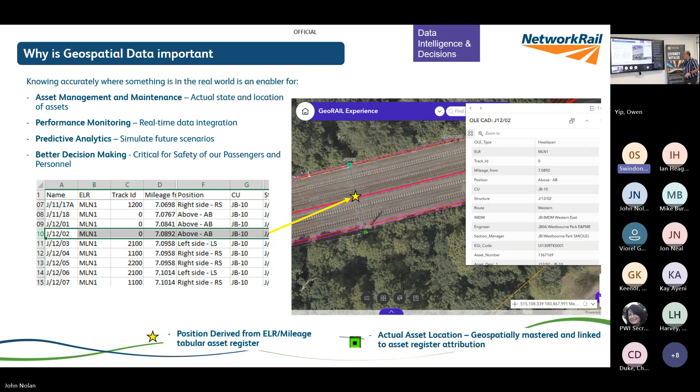As part of that problem statement, I think it'll come up in a second on the screen - yeah, Uffington Road Bridge. I put these slides together for the heads of asset management a couple of months ago, and I was on the train coming down. I know Uffington Road Bridge from a long time ago. The top is an example of some of the assets that are in that location, and underneath the image is some of the data sets - and that's just a minor amount of the data sets that are in there. You wouldn't fill the slide with that.

So what we're trying to do is understand what information is in this location and across the route. How do we visualize it, and how can we link to the system that's there, or if we don't link to the system, how do we understand where it's located? So that's the big issue that's there.

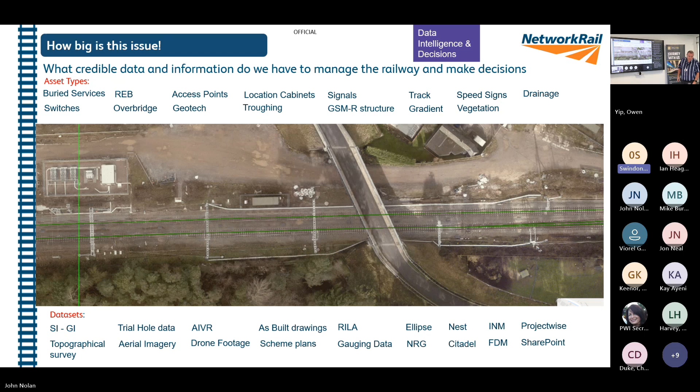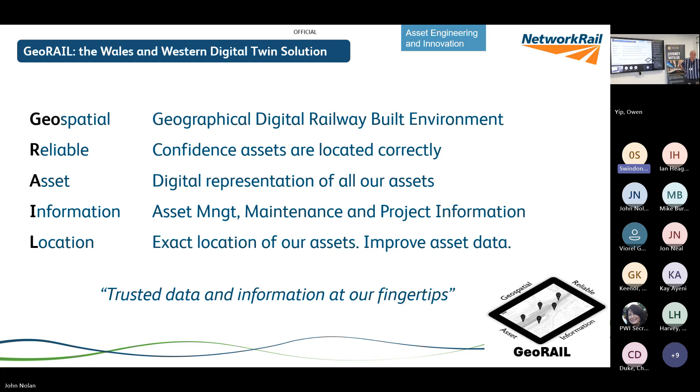So what we're doing is working on GeoRAIL - Geospatial Reliable Asset Information Location. It's our own term we thought of ourselves, it's our own logo we thought of ourselves. But you know yourself, you have to have a catchy name for something you're trying to work on, and that's what goes around the business. It is being used quite a bit actually at the moment. So it's all about people understanding the data and information that's available for them as well. This is kind of like the mechanics behind it.

So what we're trying to do is visualize the physical railway in the digital world. We have 2D information, 3D information, and reality information, that's point cloud photographs. Even last week, Ollie, who's part of the team, was talking to some of the maintenance guys about doing 3D scans of the access points.

So they can understand how it works, and that's part of that reality data. What we're trying to do is talk to asset management, maintenance, and projects to capture requirements. Asset management is fair enough, I'm in that world and can understand the requirements and linkage there. National Records Group - where's the health and safety file? Where's the as-builts for all those shiny overhead line structures around the route, and how do you get access to them?

From a maintenance point of view, they've got a lot of systems they use, a lot of maintenance scheduled tasks, work orders. How do we visualize the information they want? And not only that, the information from their SharePoint sites - how do we even get that feed in? That's part of the requirements we're capturing with them.

And then of course there's the project data, the project information - is that health and safety files again? It's the project information. If a survey was done, where's the survey, where's it located? So we're working on that at the moment, to have a visualization of surveys that were done in the past, even if done 10 years ago, it doesn't matter. For Maidenhead Station, when they were working on platform 1, a 2016 survey of the embankment was used as part of that.

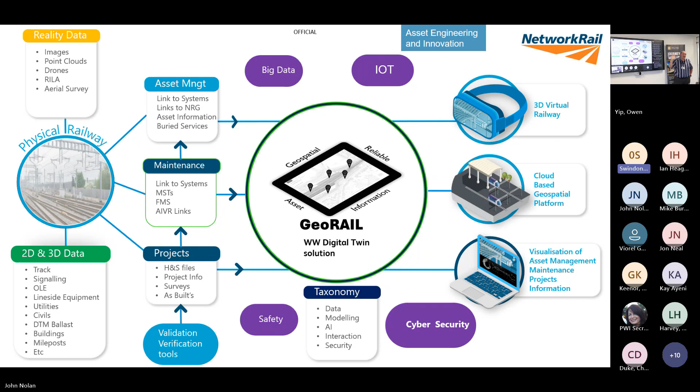So the plan is that we have a 3D virtual railway, a cloud-based GIS platform, which is the key to bringing it all together. The geospatial platform is key for the virtual railway, and that enables people to visualize the data they want to see. So what does it look like?

Some of the work we're doing here, we are building an ecological database, that's going to be a back end to this. We're working with the ecological teams in Wales and Western, very advanced on that, capturing their requirements, and we're working with Esri to build a solution into this for external and internal use. That's going to really change the dynamic on ecology, because at the moment everything is all over the place in different storage locations and not really managed.

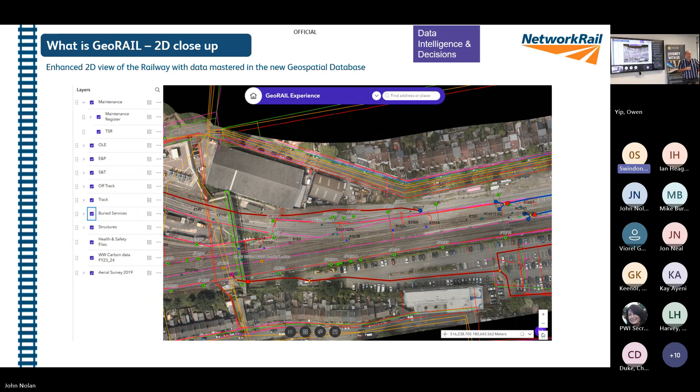Part of it as well is that from the requirements we're linking up to parent-child relationships with Ellipse. So any work orders, maintenance schedule has the history behind that as well. We've done an awful lot of work behind that. We're connecting into Ellipse, so it'll be a live feed from Ellipse in here. And if you click on an asset, it'll tell you this is my work order, this is work outstanding. And then as we move forward, we're talking with some people about generative AI.

You can ask the question, how many work orders have I got outstanding this week? What's my future work orders? Or from a managerial point of view, how many has the team got outstanding and who are they with? Things like that. So we're working on that world as well as part of that.

But that's based on the need to display those MSTs and work orders in the geospatial world. Because at the moment they're all in Ellipse and it's all structured data, tabulated. We want to put it in the real world and make that view as part of that.

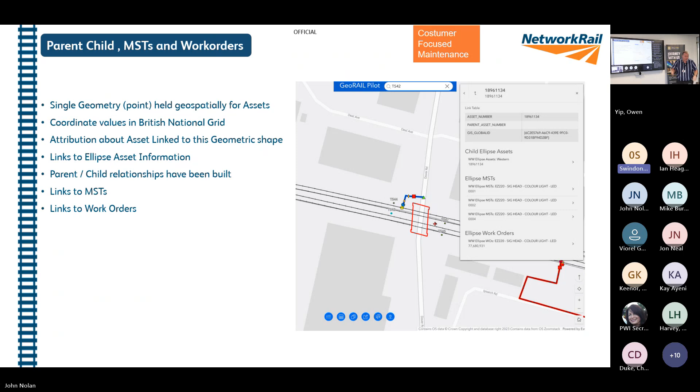So just to go back, links to Nest, which is the structures database, link to health and safety file, link to the OLE as-builts, that's already in there. So this is an old slide. That was the 2D world. That's based on GIS, and that's the linchpin behind everything we're trying to do.

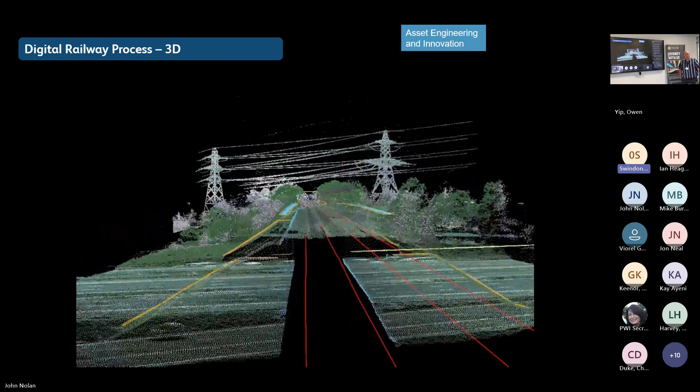Just moving into the virtual world. Here's an old video from, I don't know, 7-8 years ago, Bristol Parkway proposed OLE design in here. I'll just show this to show the people in Network Rail and outside the process to create the data sets we have geospatially. So we're validating all our asset data geospatially based on this information, which is a RILA train-borne survey, which is highly accurate for local geospatial, and also aerial scans.

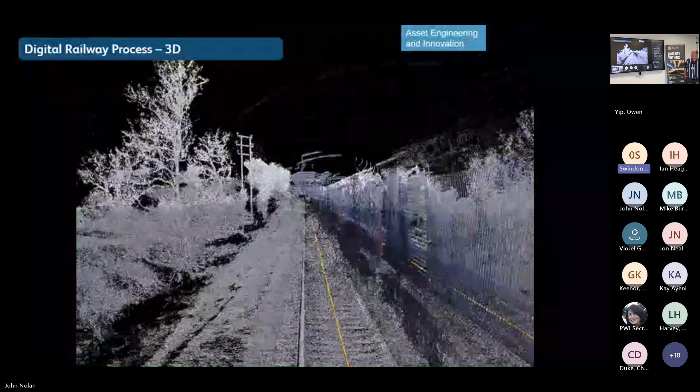But from that, and we're very lucky that we had WEP and Crossrail and Poplar Line and Old Oak Common, they'll all feed into this as well. But basically, we're building this digital view of the railway, which has all our visible assets in there, and where possible, our underground assets as well. I'll just let it play out, but it's just showing you what we're trying to do.

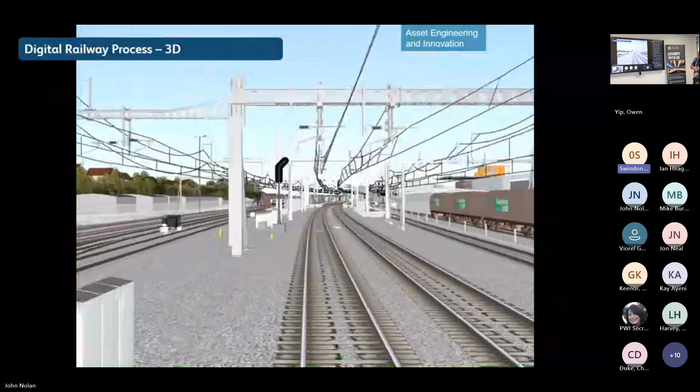And the key thing for this is it's all about keeping people safe. So it'll be open to anyone in the business or externally to actually make decisions and understand from that immersive view. And I remember on outside they were replacing some old switches near Maidenhead a long time ago, and they wanted to have that view and see what the design looked like. And that's what we're trying to do.

So the key message from this is if you're not already doing it, your 3D design needs to feed into this. Your 2D design is fantastic, but your 3D design needs to feed into this as well. And it's happening, it's happening in enhancements. We're trying to get that into a better state in other parts of the business.

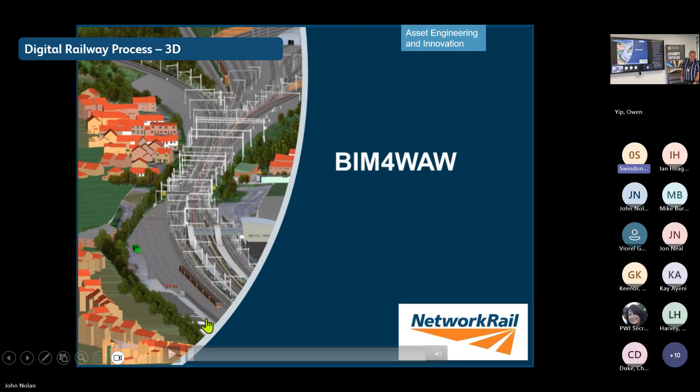Okay, so what's the benefits? That's outside Bristol Parkway Station. What we're trying to do is build an environment, and it's not iTwin - I'll go through that in a minute - iTwin is kind of the foundation for it. We want people to place measurements, identify coordinates, create sections, and basically allow anyone in the business to see what's there and make decisions based on that.

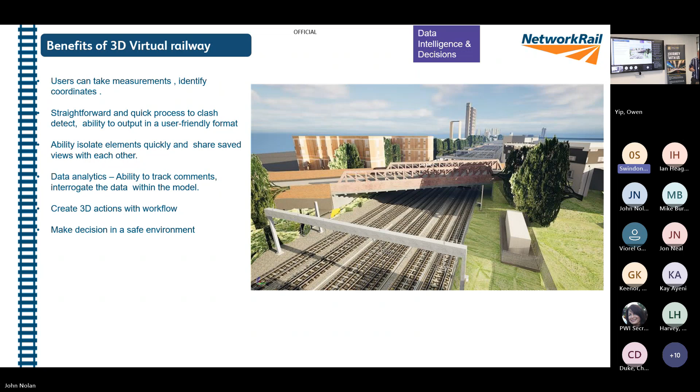Here's some old slides that were decisions that need to be made on the Great Western Electrification Programme. In this example here, the model was there, the railway structure was in 3 dimensions, and they needed to move 50 functional supply units from Reading and Newbury to another part of the route.

That's when there was an awful lot of to and from with assets and installation, and that took 2 hours. The thought behind it was we have to drive to site, get out of the car, find the access points, maybe get a possession, get a site safety, and walk that 16 miles. So it's good to have the 2 hours we're doing a virtual walkthrough instead. That's what we want for our people on the ground, in projects and in maintenance as well.

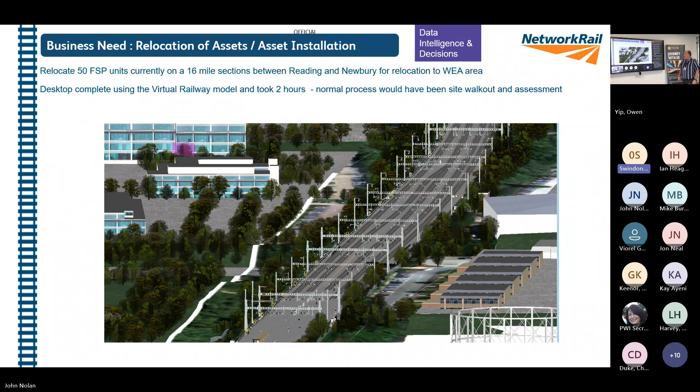This is an example of buried services that we inherited from those projects. This slide was done at the time because there was a fire nearby, and they wanted to understand what assets were on the railway. So this was put together to show what's there. But I'm showing this slide to demonstrate what underground services should look like and what our plan is to push it out across the route over time. It's not going to stop people digging underground, but if you're aware of what's underground, you'll make more informed decisions. We learned that on electrification too, putting in trial holes and things like that.

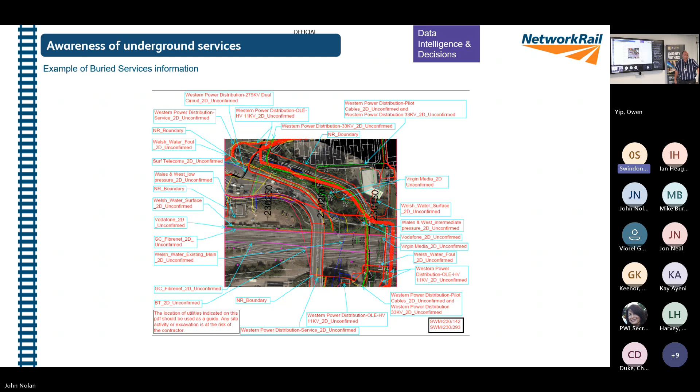One of the groundbreaking things we did, and Ollie played a main part in that, was Severn Tunnel. Everyone knows what it's like, everyone knows about the access conditions - it's just a dark patch for about 10 minutes. But we created a 3D virtual model of Severn Tunnel. The need was to get dimensions, check what's there, do virtual walkouts - the same thing we spoke about before, but the difference is you're in a safe environment and can do it any time of day.

This has got an awful lot of traction and is being used for a lot of projects coming in. Lately they updated the overhead line in the tunnel, and the model was a key part of that, even for the animations produced for access as part of planning. There's drainage being put in and other works happening too. That's why we're writing these digital requirements - the need to provide digital information to feed this, but by default that'll permeate across the other parts of the business as well.

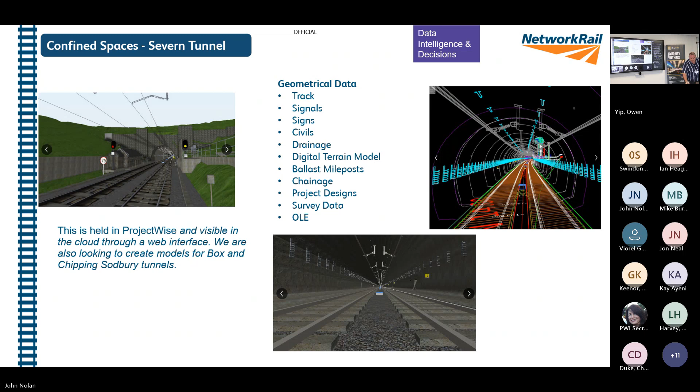In Pangbourne, there was a shine coming off a part of the network, and the drivers were complaining about it. So what Ollie did was model in a board to block that and prevent the shine. It was signed off in 2 or 3 days, and then they went out and put it in place. That's fast, dynamic turnaround - that's the way you want it to be. That's what the technology is there for, to enable those decisions.

Just to go on that as well, the premise for doing signal sighting and driver route learning - the train operating companies and the freight operating companies are all part of that, and all know about that process and invested in it as well. So where are we going on this? I guess that's part of the next piece.

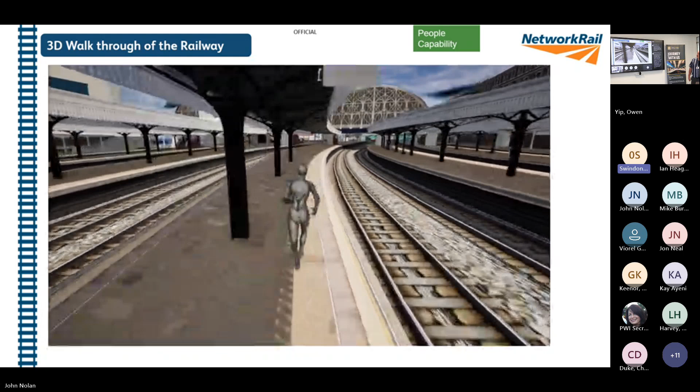I put this in for a bit of fun as well - it just shows where we're going on the journey. So it's an animation run through Paddington. You can see the model, you can see the station is there, and that's Ollie running around fidgety, you know what I mean? Someone's after him, I don't know who's after him, but maybe he's hungry, he's going to get something to eat.

But this is where we're going with this. We're going from the world of 2D design, 3D design, existing asset, using that information geospatially to produce something we can walk around the railway and view interactively. So we're moving away from the grey design world, which is a very big need for clash detection and signal sighting and all the things that's used, which is absolutely fantastic.

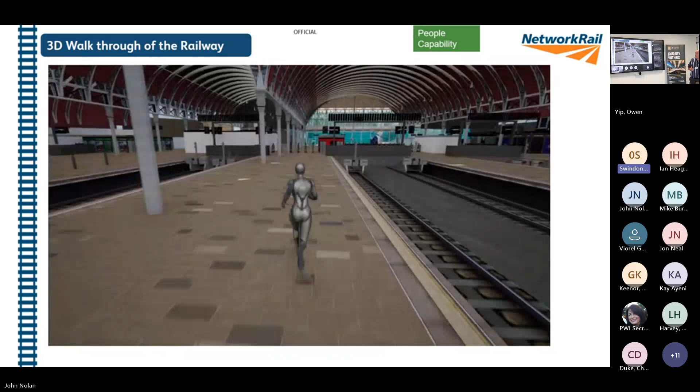We want that finished information in an environment like this, so people can get interested, and people are getting very enthusiastic about it as well. I'll stop that there - this is just an example of what we're doing moving forward.

So the message from that is, it's the information you're supplying and the information the business has - it's being used full life cycle now. So that whole dream about a project ending and it's thrown in the bin and then it starts again and we can't find the information, that's all gone away. It's really full asset life cycle maintenance.

And what's the pipeline? We coined the term 3.5D - I'll show you that in a minute - but we want people to be more informed when they're managing possessions. Possession management, planning works, using the technology that's there, using terms like 4-dimensional, which is time, linking that in with possession planning and system information and other information as well, so people on the ground can plan the work successfully, understand any clashes in that environment, and deliver it safely as part of that.

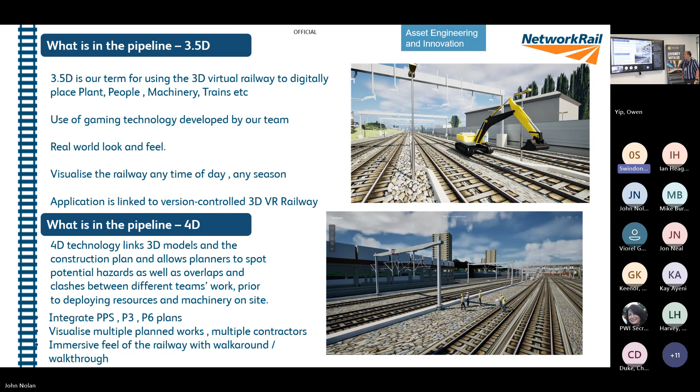So here's an animation showing you just a glimpse of what we're doing. The focus is Paddington to Reading, and the Western Route Director wants this as stated - that area is very busy. So what we're trying to do is place people, plant, machinery.

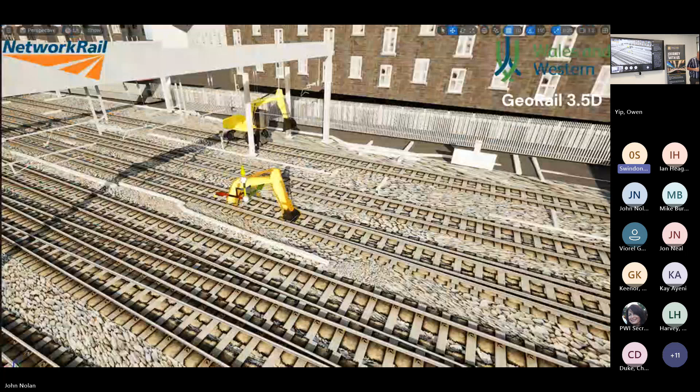We have the virtual railway - we're building up our library of plant, building up our library of people, building up all that database as part of that. We're going to have this as an executable file that anyone in Network Rail can install, and they can use it to place plant and information. So you're moving from your schematic-based plans, which are about 5 miles long with outlines on them, into that 3D immersive world that allows you to put the plant and machinery and everything inside that possession zone. And that's fantastic.

And again, just to state it - that's information that's been provided from projects, that's been recycled, that's been used for maintenance purposes, driving that. That's a key part of it as well. And then the 4D world comes into that - as it gets to an advanced stage, putting the P6 plan or the PPS plan, which is totally different than P6, together, having multiple plant moving on that. That's what Ollie's working on now.

So what's the future capability? I've been talking to quite a few people in the business. Scenario-based training - that's fair enough, how do you go on site, how you operate plant and machinery, how that works is one aspect. Disaster planning, wargaming - I'm having a conversation about Severn Tunnel. How do we wargame that? If a train gets stuck, what do we do?

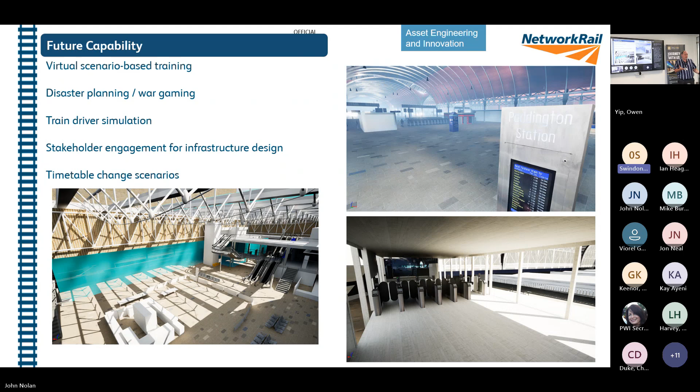So how can we put that in the virtual world? Train driver simulation is fair enough. Stakeholder engagement for infrastructure design - most of you guys are doing it anyway, it's part of your design process. And then timetable change scenarios, which is something we're looking at.

So behind that, and this goes back to the start where we spoke about data and the quality of data and the price of data - it's not going to work without that information on screen, basically, to feed that digital twin, because at the moment there's nothing there. It's the information we receive - the surveys, the designs, all that information, the paper-based information, the IoT feeds, the sensors, the drones, the photos - all that information is what we want to be able to build this, and we are ambitious on it.

So our plan is to build the existing twin. That's the here and now of the railway in 3D view, 2D and 3D, GIS with 3D technology. Then we're looking at network monitoring, feeding in system information and diagnostics.

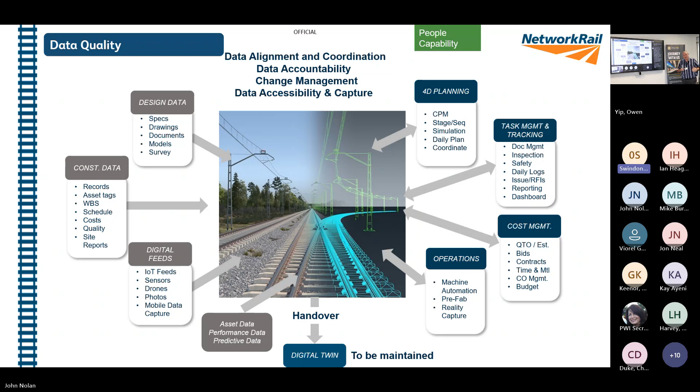And then from that, looking at the data quality side, it's about predictability, being able to make decisions based on all that information. So that's about people and capability. By the way, these are all tied in with the route-based objectives on people and the different work that happens there. So that's key. To help with that, I've put together a data quality framework, and it's all about treating data as an asset.

Because we don't treat it as an asset, and it is an asset. It's one of the most expensive assets we have at the end of the day. And this is the message I'm getting across to everyone. Actually, it is getting good traction. Data is being spoken about a lot, and in the right places.

But it has to be treated as an asset. That's the first thing. Understand accountabilities and align it to risk, because there's a lot of risk associated with this. We need to clarify who's accountable for data, what the requirements are, and things like that. As well as that, understand the skills and behaviors needed for whole life management of asset-related data, because that's going to underpin how we make decisions.

And I'm not just saying that as a nice thing. If we get our data right, people will make decisions based on that data. They're making decisions on it now, only it's not right.

So part of the components to this is people, policy, process, safety, and assurance. Assurance is a big thing.

So we are doing assurance on the exchange of asset information, and we are speaking to the sponsors, Old Oak Common, about doing that every couple of months. We're talking about hand back now as well on Old Oak Common. We're going to go around to all the various actors that are going to hand back to Network Rail, and we're going to have interviews and discuss with them - what are you doing? What are you handing back? How are you going to hand it back, and get ready for that?